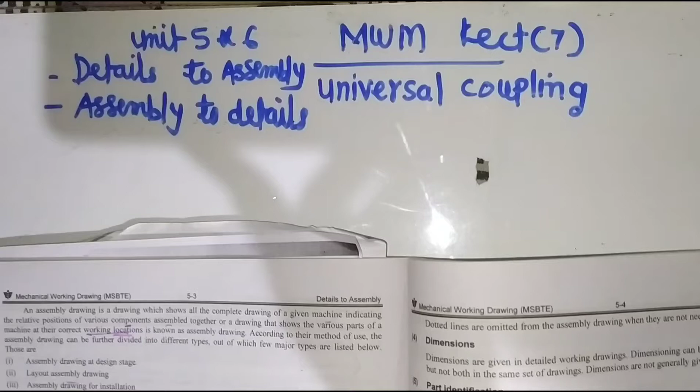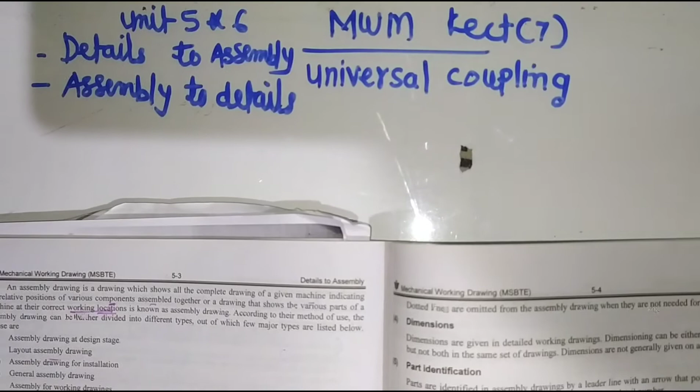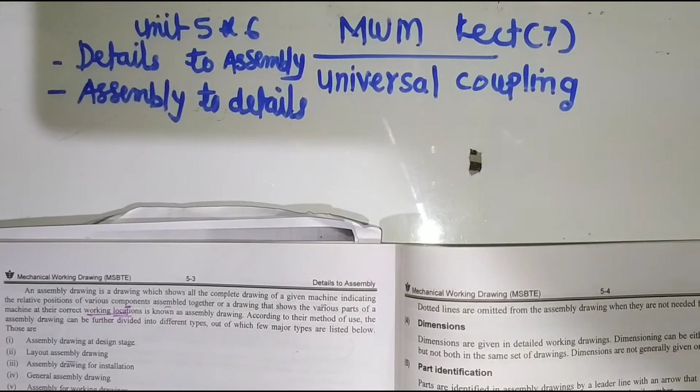Now we have already dealt with units 5 and 6, and we have studied the conversion of details to assembly and assembly to details. They both are the same, we just have to convert it. Now we will study universal coupling in this lecture, universal coupling details as well as its assembly.

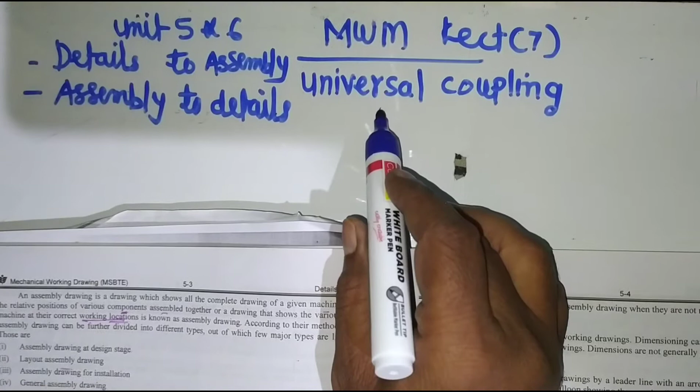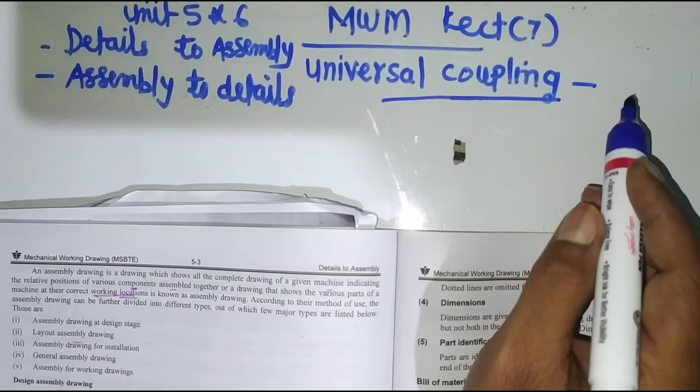Now first we will understand what is the universal coupling. As we know, couplings are used to transmit power from one shaft to another shaft. Universal coupling is a non-aligned type of coupling. The universal coupling consists of two

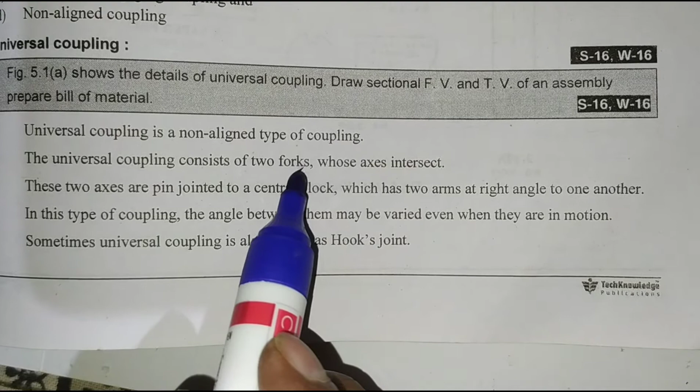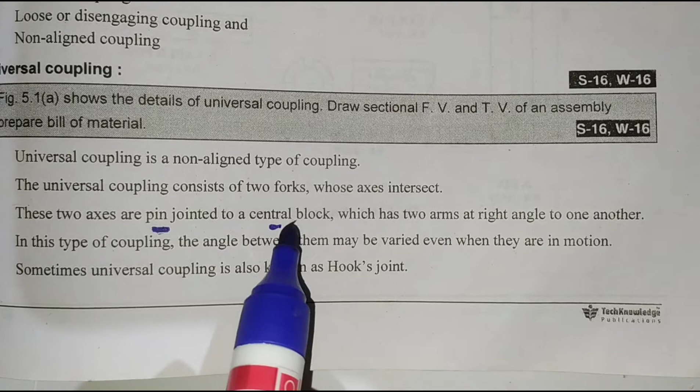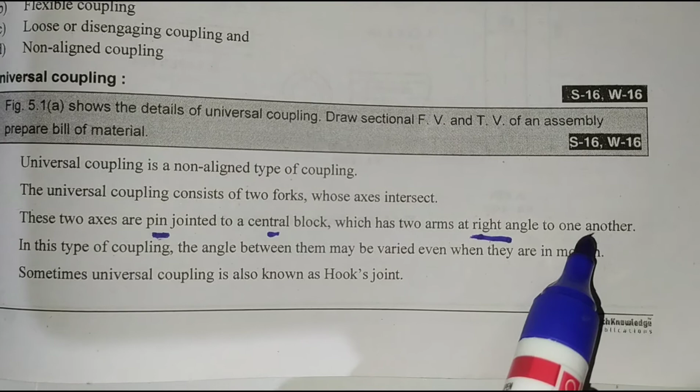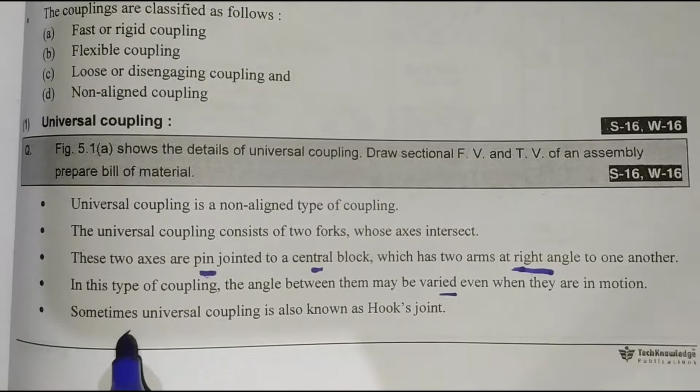forks, whose axes intersect. These two are pin-jointed to a central block, which has two arms at right angle to one another. In this type of coupling, the angle between them may be varied even when they are in motion. Sometimes universal coupling is also known as Hooke's joint.

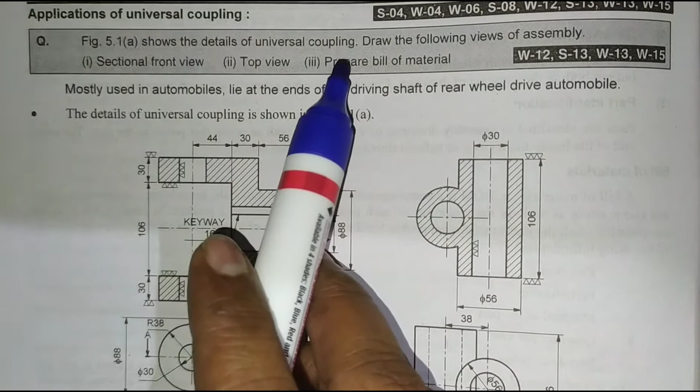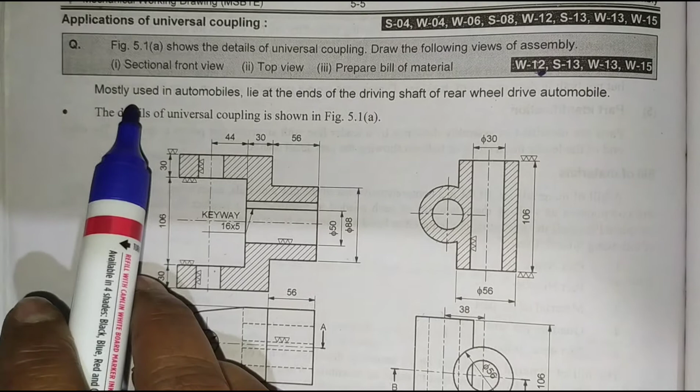Now I will read the question from details to assembly. Figure shows the details of the universal coupling. Draw the following views of the assembly: sectional front view, top view, prepare bill of material. Now this is the question. Here they have given that mostly the universal coupling is used in automobiles, at the ends of the driving shaft of the rear wheel drive automobile.

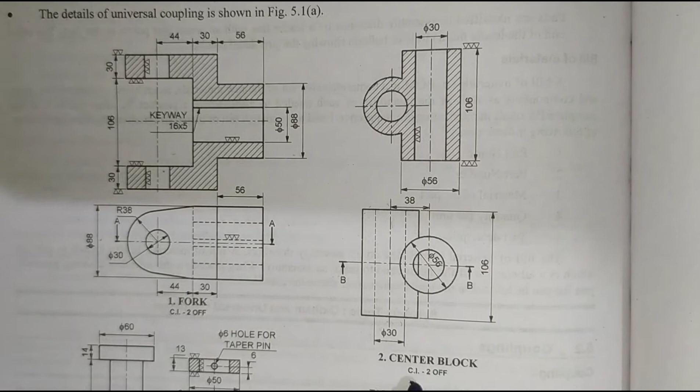Now here is the detail. First one is the part fork. Fork is made up of cast iron. There are two forks. One is vertical, another is horizontal. Here is a center block. It is also made up of cast iron. Third one is pin. It is made up of mild steel. Fourth one is collar, mild steel.

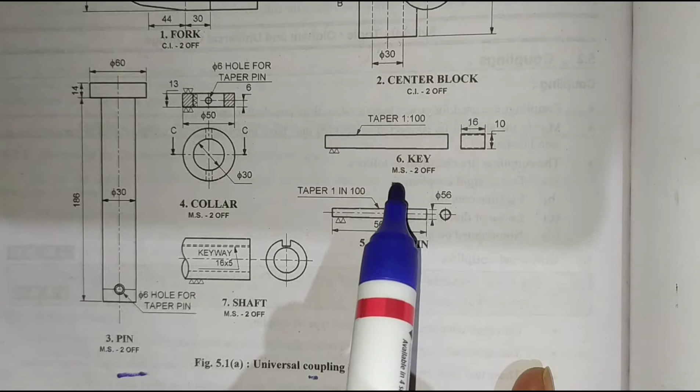Fifth one is taper pin, mild steel. Sixth one is key, mild steel. Seventh one is shaft, mild steel. So there are total 7 parts to compile this assembly. They have also given the shaft.

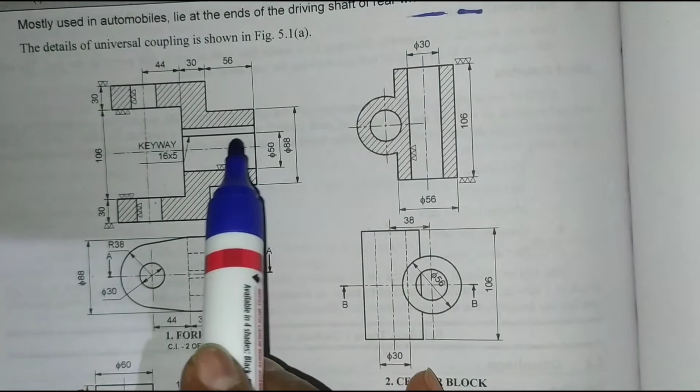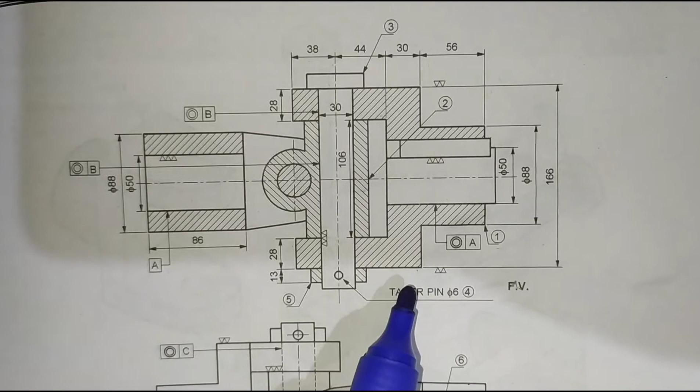Now this is the assembly they have given. This is the sectional front view. This is the top view. They are numbered. This is part 1. This is part 2, that is center block. This is part 3, pin. This is part 4, collar. This is part 5,

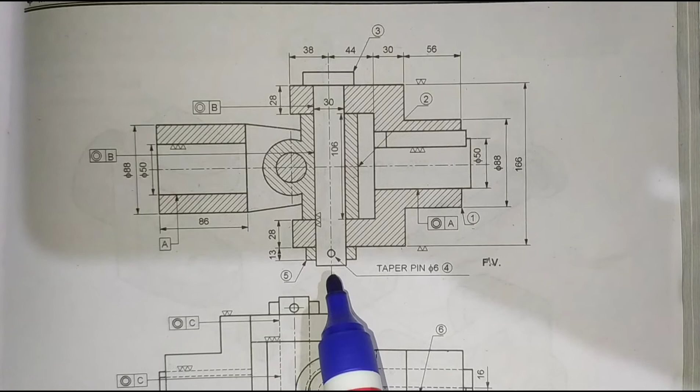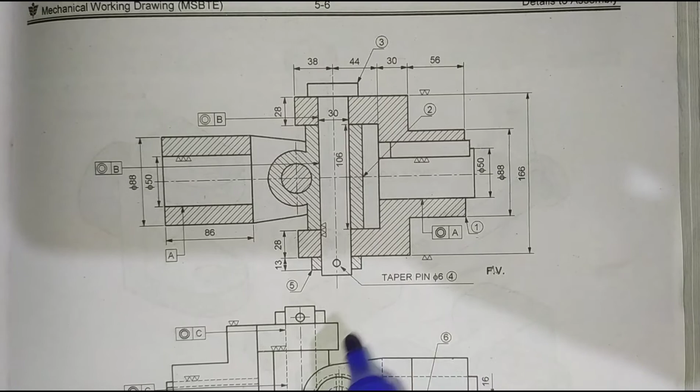taper pin. Now 6, which is the 6th part here, key. Key is the 6th part. And 7th part is the shaft. The shaft they have shown here. This is the shaft, and this is the front view, and this is the top view.

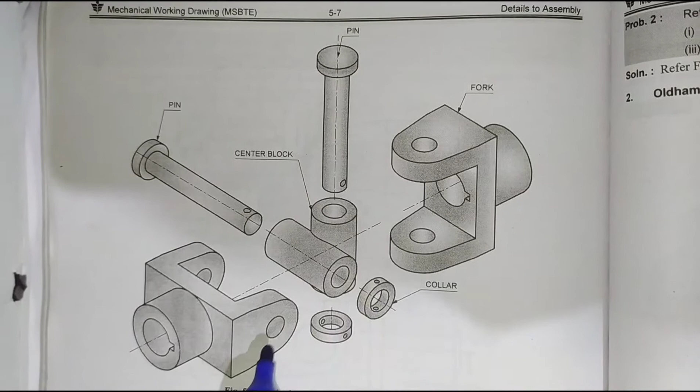Now if you look at this figure, first we have to understand the 3-dimensional figure of each part. The first part is the fork. This is a vertical fork. The center line is vertical. Here is a horizontal fork. Its axis is perpendicular to HP, and here the axis is perpendicular to VP. So I will draw orthographic views of this fork.

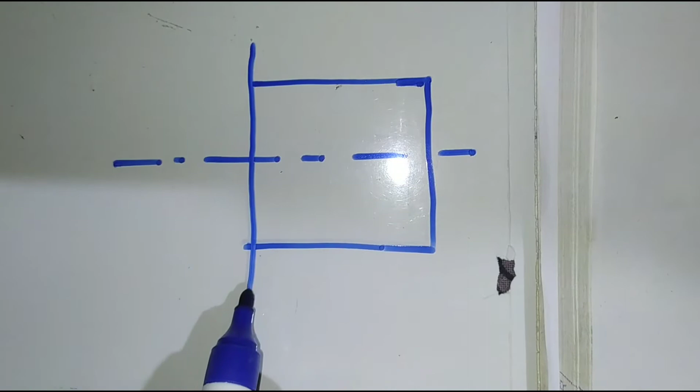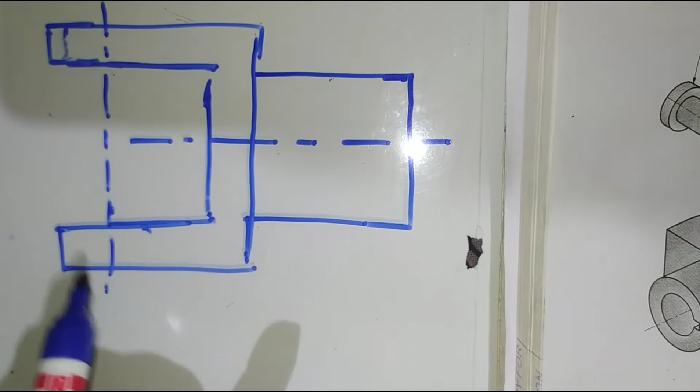If you look at here, I am drawing the outline. Without cutting, this will be the dotted lines, and here a hole is created.

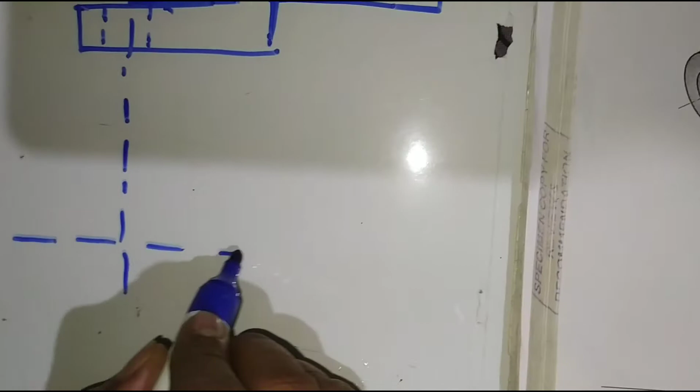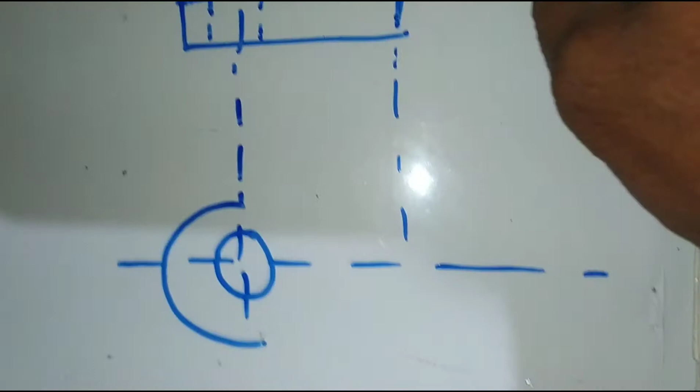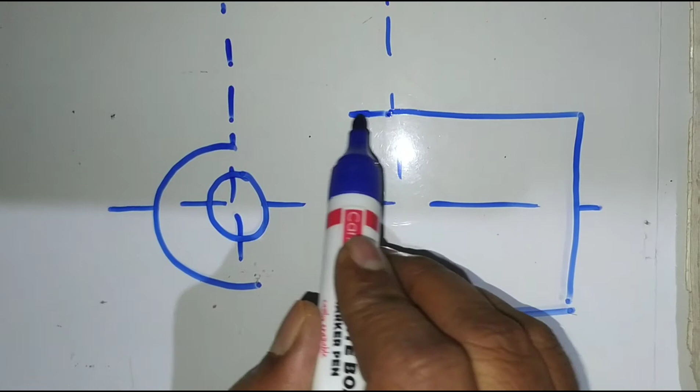If I draw the top view, it is a symmetrical part. Here is a hole, here is a half circle, here is a round portion horizontal, so same distance. If you draw here, this will be the dotted line, this will be the dark line. This is the top view, and here is the hole.

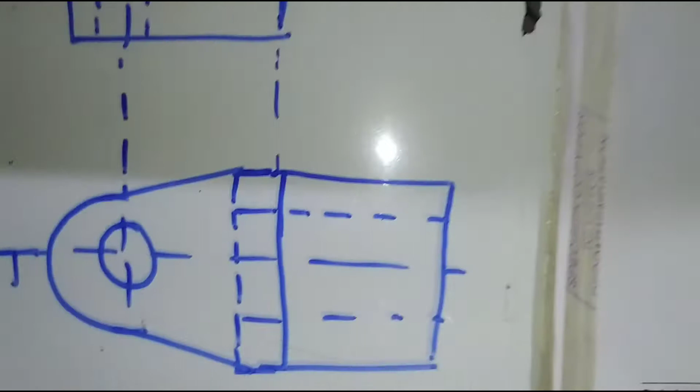Front view. Now if you cut it here, this much part, it is an imaginary cutting plane. Parallel to VP, the sectional front view is obtained. It is imaginary. Half portion is removed. So here is the cutting plane I am showing, a dark line. It is imaginary cutting, it is not cut actually.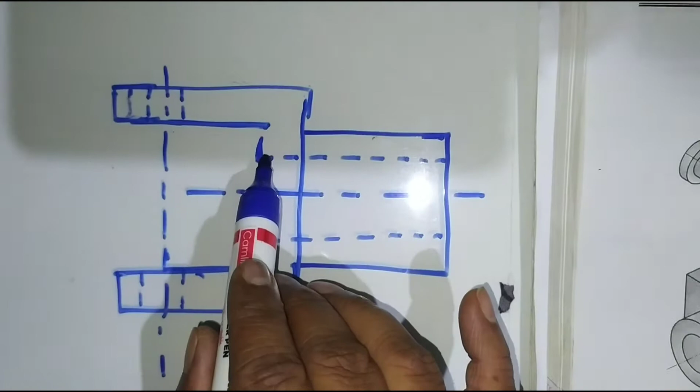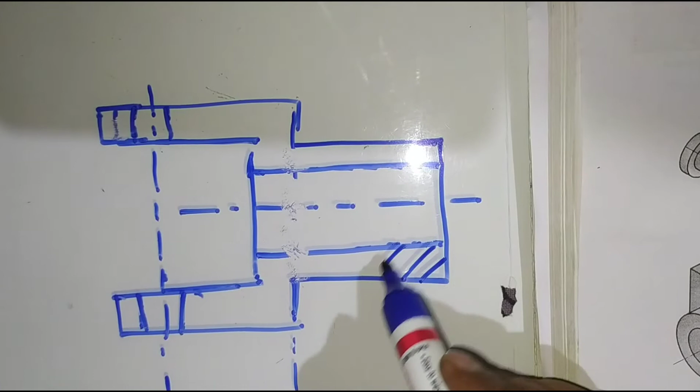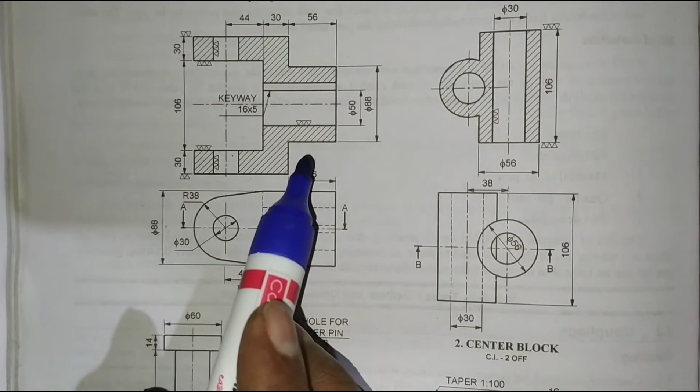So what will be the difference here? Here, this line will be converted into dark line. The dotted line will be seen in front of the observer, and this is common contact line. This part will be removed, and a section line. So this is your first part. I have shown you how it is converted to orthographic view and taking half section.

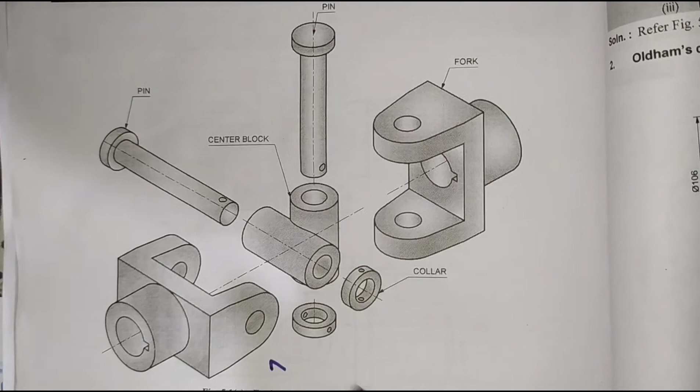Now we will look for the second part. They have given two forks. One is vertical and second one is horizontal. Now this is the second fork, whose horizontal axis is perpendicular to VP. Where we observe the front view, I will draw the front view here. Look at here, front view. This is the center line.

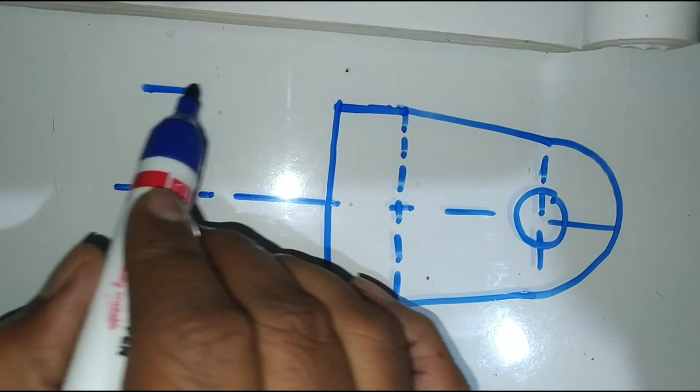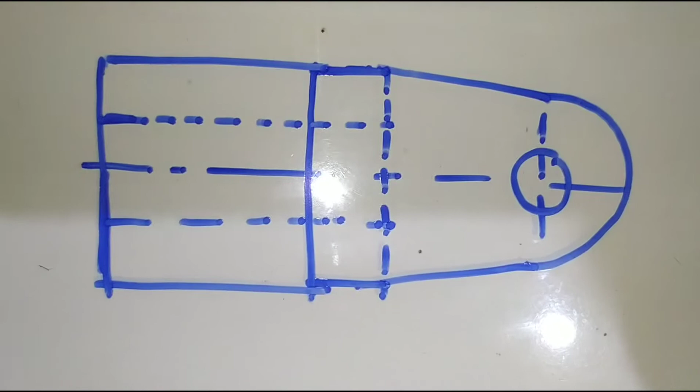This is a cylinder, hollow-like cylinder. Here with a dotted line. Okay, this is the front view. Now what will be the top view? I transfer this center line here.

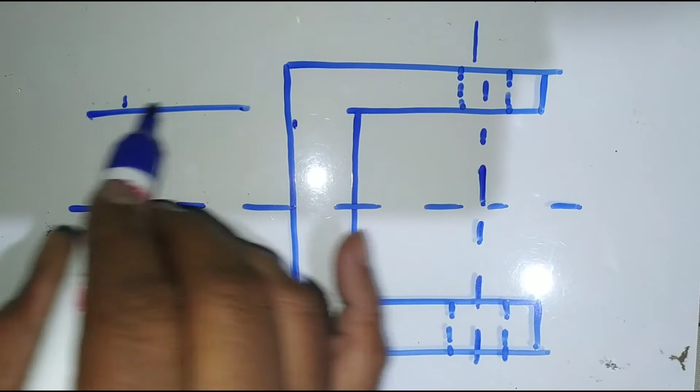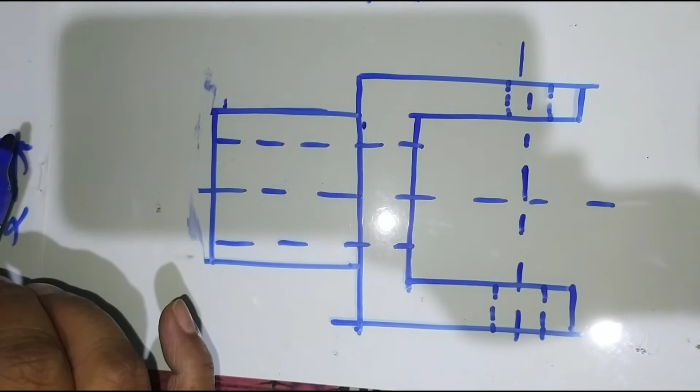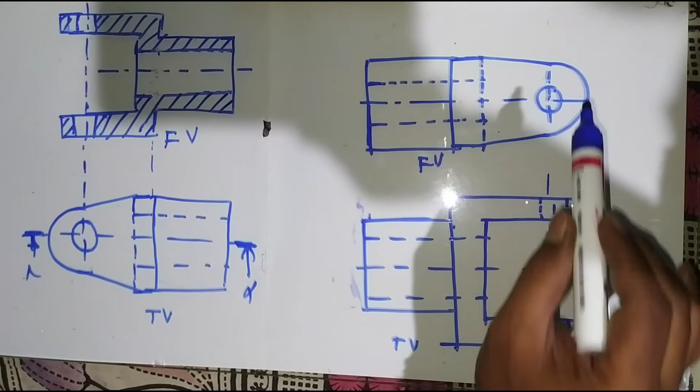Now, what a difference we observe in these two figures. Initially we studied the cylinder whose axis is perpendicular to HP and perpendicular to VP. This is the front view of the same figure. This is the top view of the same figure. Its axis is perpendicular to HP, and here is the front view of the same figure. Here is the top view whose axis is perpendicular to VP. So there is an interchange: the front view will look like the top view, and the top view will look like the front view.

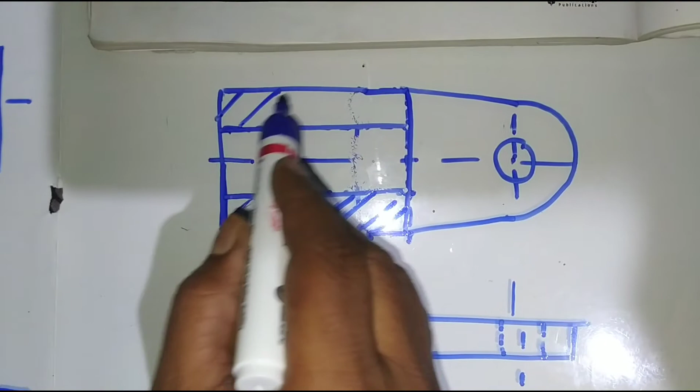Now, if you take the section, that is a full section, half portion of the part is removed. Then what will be the changes here? This part will be seen dark. This part will be removed here. This is converted into a dark portion. Only this much portion is seen here. It is converted into the sectional front view, and this is the top view.

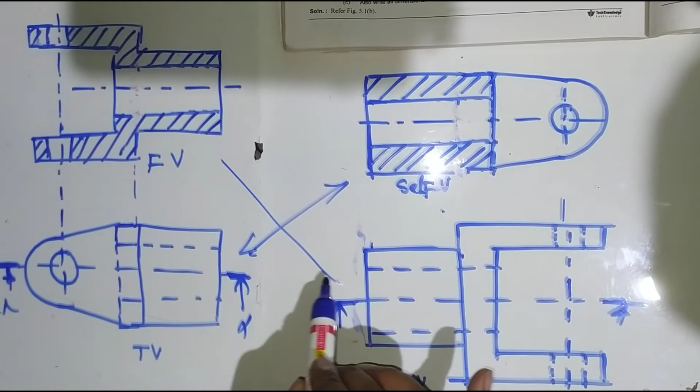Okay. Now, why I have given this concept is that it is very much important. This figure is not given in your question. They have just given two forks, one vertical and another horizontal. You just have to interchange it. The front view is the top view and the top view is the front view.

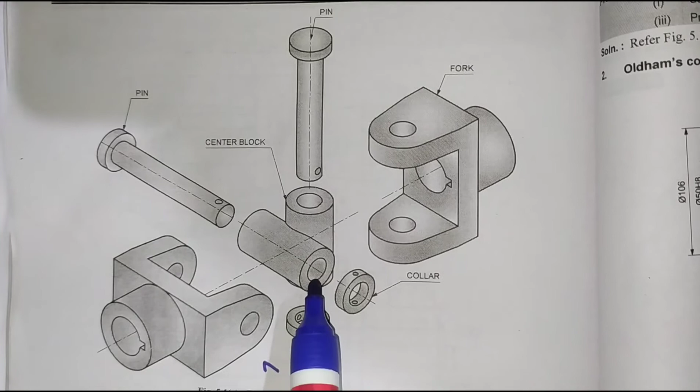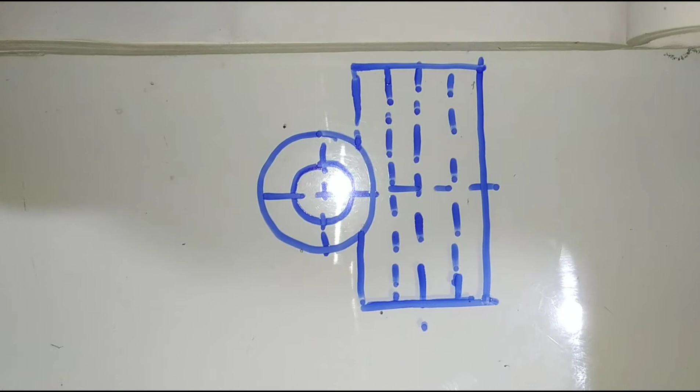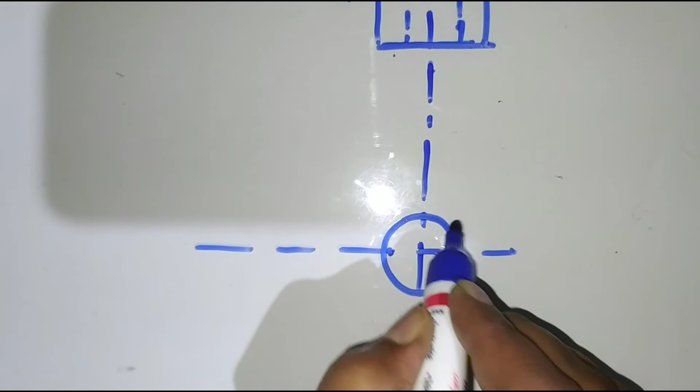Now, here is the central block, also called the central disk. As you have studied in the notations, the central block is two hollow cylinders at right angles, whose one axis is perpendicular to HP and another axis is perpendicular to VP. If I draw the front view, this is the center line. At some distance, the same cylinder is vertical, having the same dimensions. This is the center line. This is the front view. And if we draw the top view here, and transfer this center line here,

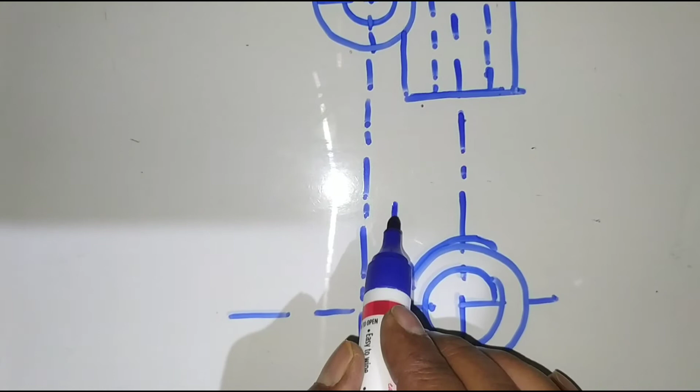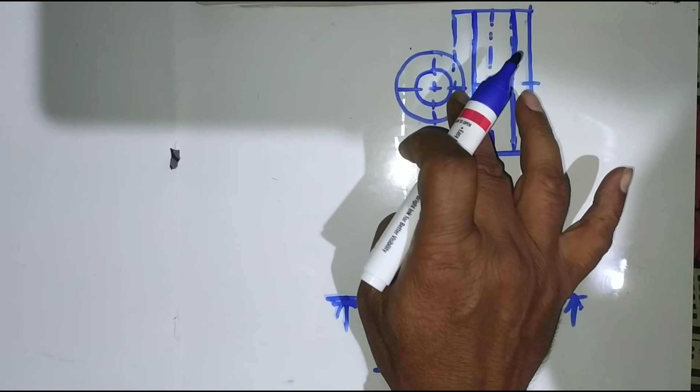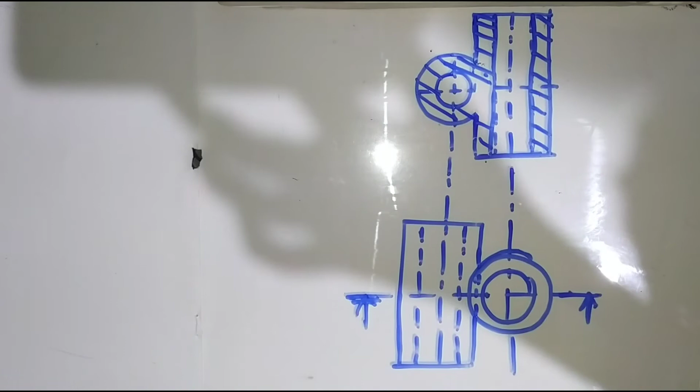now if I cut it here, a full section, what will be the changes? This will be dark. This portion is removed from here. And the section lines are in the opposite direction to that of the fork. That is the central block.

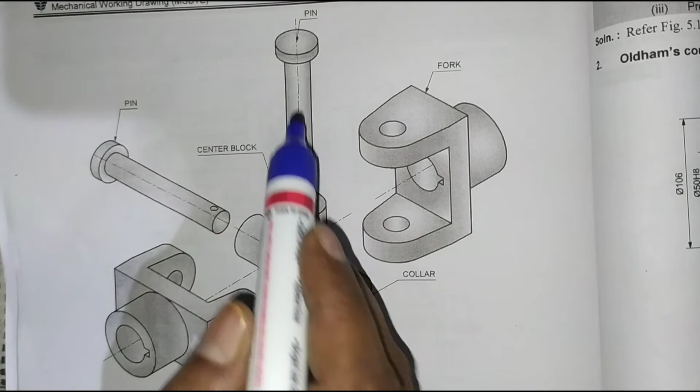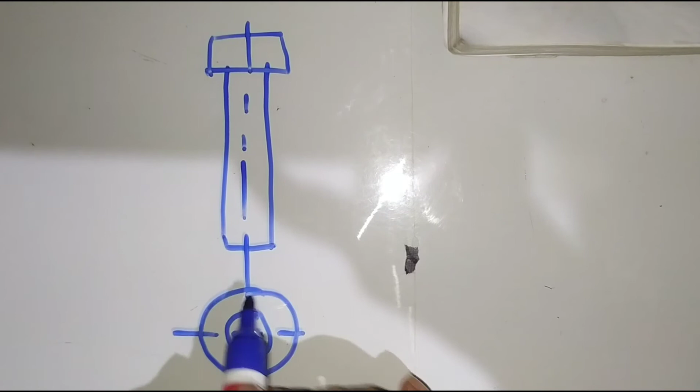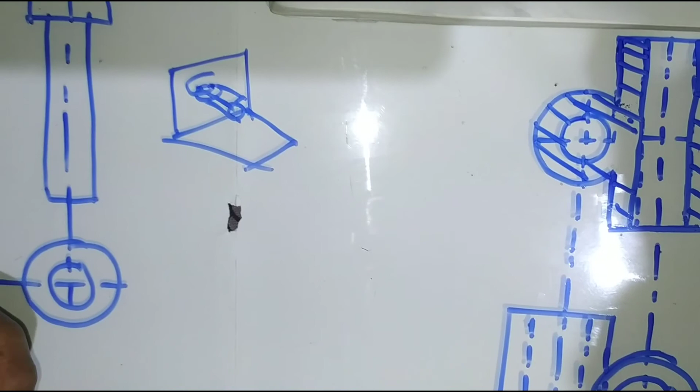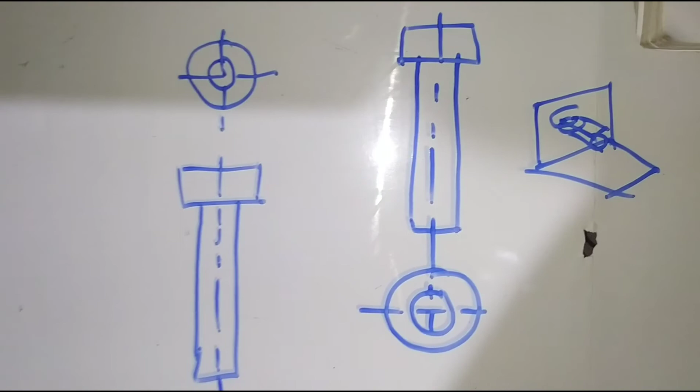Now these are pins, one vertical pin and the second a horizontal pin. Each has head diameter, head length, shank diameter, shank length. If you draw the front view of the vertical pin, this will be the front view. What will be the top view? This is the circular, cylindrical part. Now the second pin's axis is perpendicular to VP. So the front view will be two circles. And the top view is a rectangle, because its axis is perpendicular to VP. That is a pin. Here we will not take a section of the pin because it joins the two parts.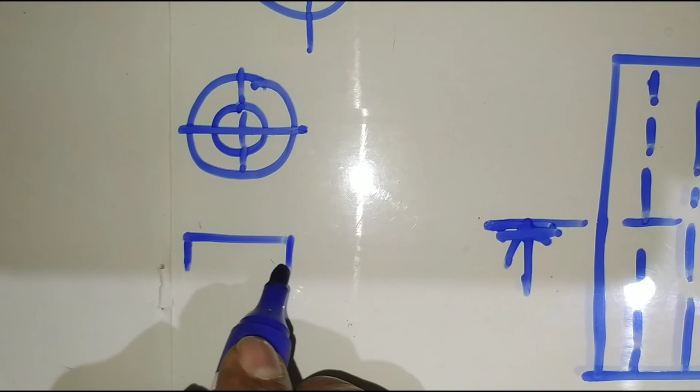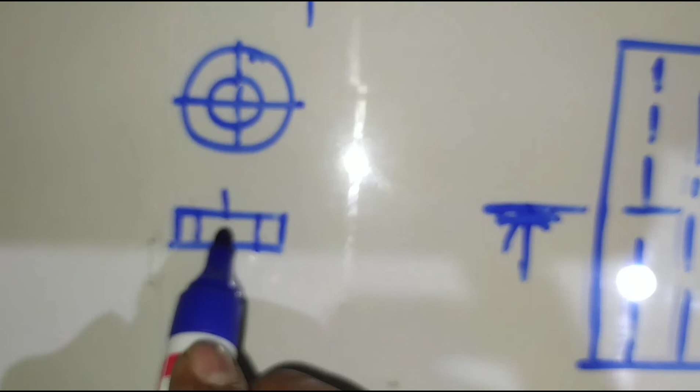Here is a collar placed at the bottom side to lock the pin. A hole is created. So the top view of this collar will be two circles and the front view is in the vertical plane. Here it is dotted. If you take a section, the dotted lines are converted, and here is a hole. And this is a collar whose axis is perpendicular to VP, so the front view will be two circles and its top view will be just a rectangle. Here is a dotted line and here is a hole that is created. These are the parts present in the fork.